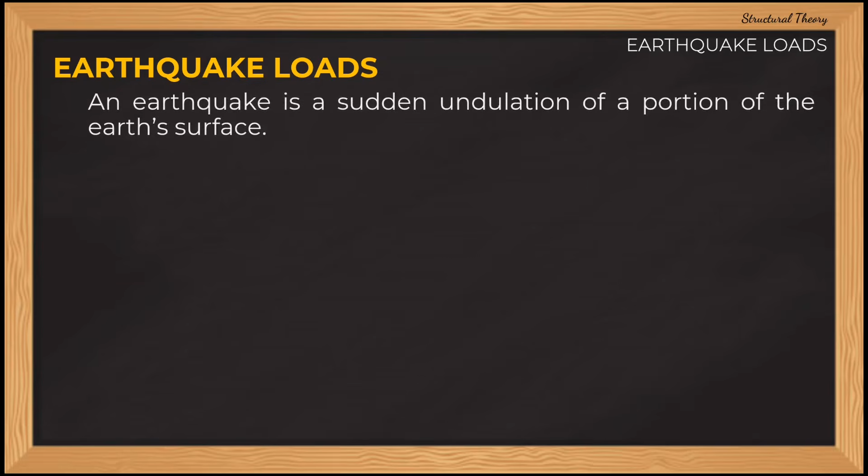Okay, so let us now define what is an earthquake load. An earthquake is a sudden undulation of a portion of the Earth's surface. So ito yung biglaang paggalaw ng crust ng Earth. So although the ground surface moves in both horizontal and vertical directions during an earthquake, the magnitude of the vertical component of ground motion is usually small and does not have a significant effect on most structures. It is the horizontal component of ground motion that causes structural damage and that must be considered in design of structures located in earthquake-prone areas.

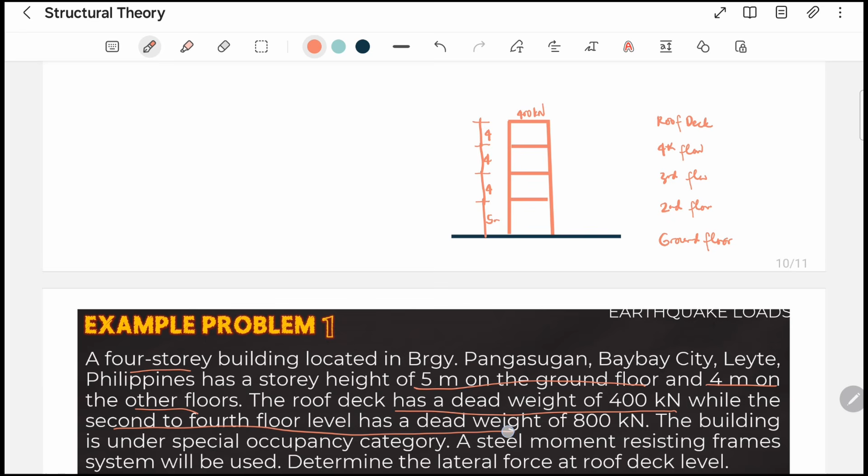Tapos, binigay na din guys yung ating dead weight or dead load. According to the problem, the roof deck is 400 kilonewtons. Okay, so according here, the roof deck has a dead weight of 400 kilonewtons, while the second to fourth floor has a dead weight of 800 kilonewtons. So, ito ay 800 kilonewtons, 800 kilonewtons at 800 kilonewtons.

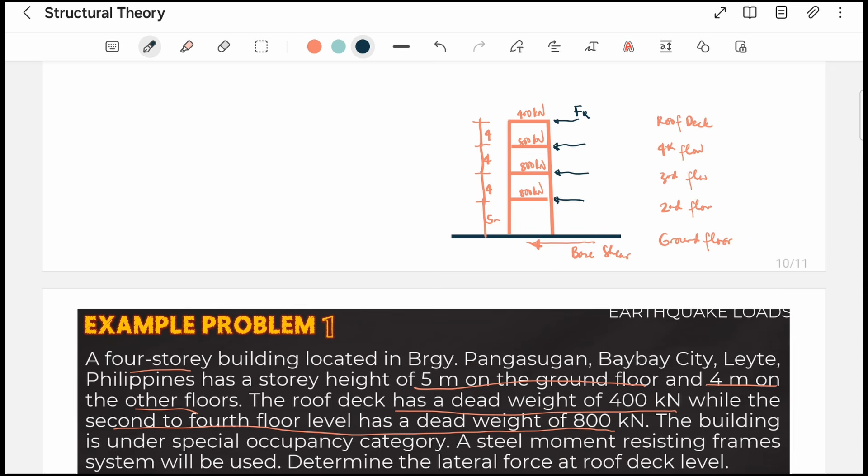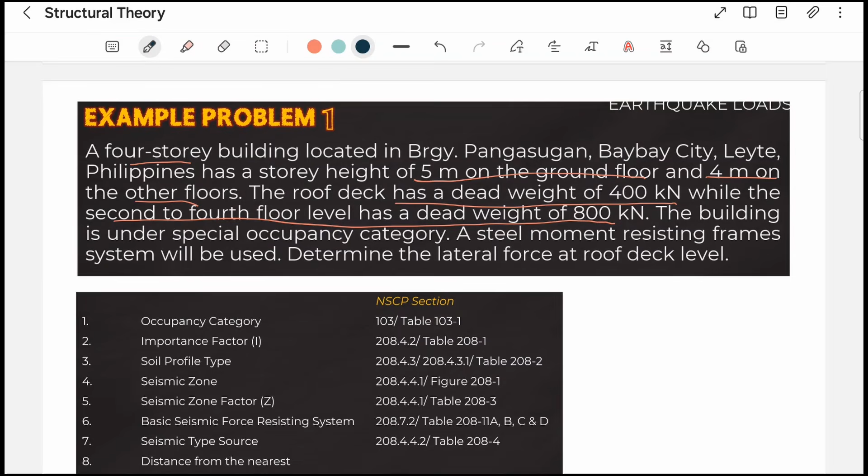Okay, so let us now solve this problem. Let's start with step 1, that is occupancy category. At ang step 1 ay makikita natin sa NSCP section 103 or table 103-1. Okay, so ito yung NSCP section 103, which is the classification of structures. Dito natin makikita sa table 103-1 yung occupancy category.

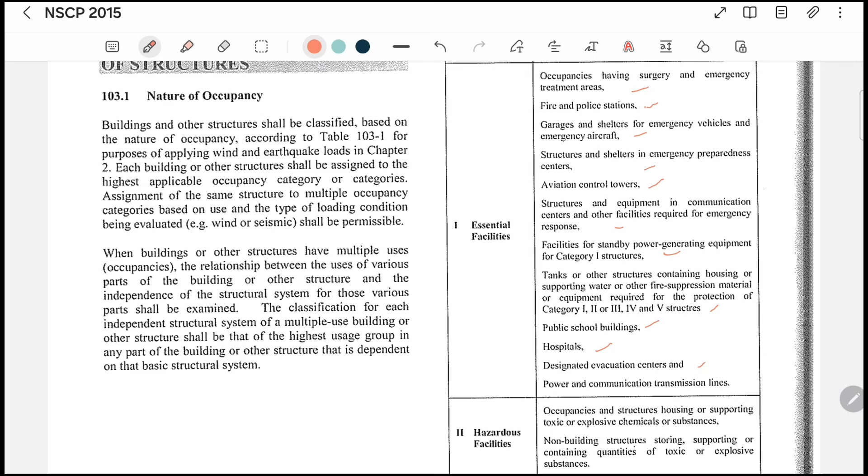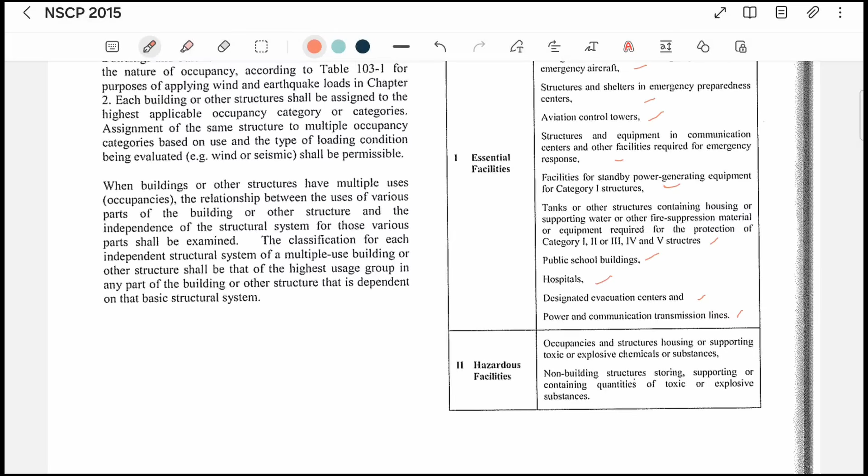Ito yung hazardous facilities. Ito yung mga occupancies and structures housing or supporting toxic or explosive chemicals or substances. Non-building structures storing, supporting, or containing quantities of toxic or explosive substances. So, hindi na kailangan i-explain. Ito yung mga structures na merong toxic na mga chemicals or yung mga sumasabog na mga substances. So ito yung mga hazardous facilities, meron silang sariling category, kasi syempre, delikado yung mga ganitong mga structures.

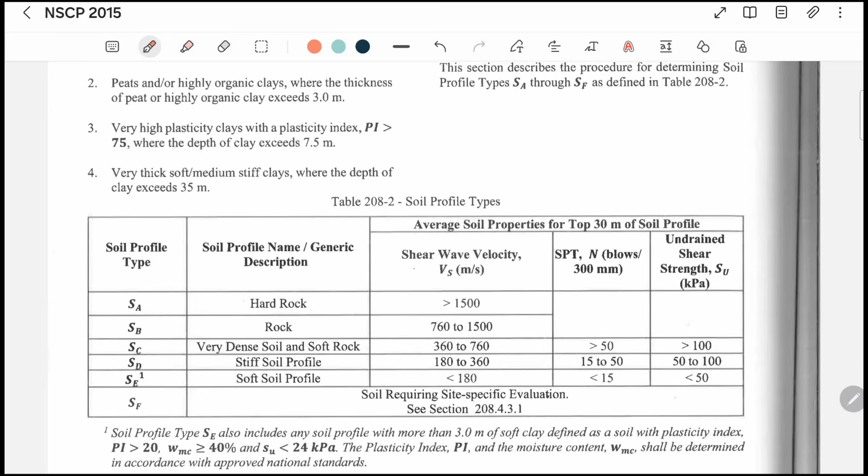Okay, pero according to NSCP, ito tayo. According dito, exception: when the soil properties are not known in sufficient detail to determine the soil profile type, type S sub D shall be used. Soil profile type S sub E or S sub F need not be assumed unless the building official determines that type SE or SF may be present at the site or in the event that type SE or SF is established by geotechnical data.